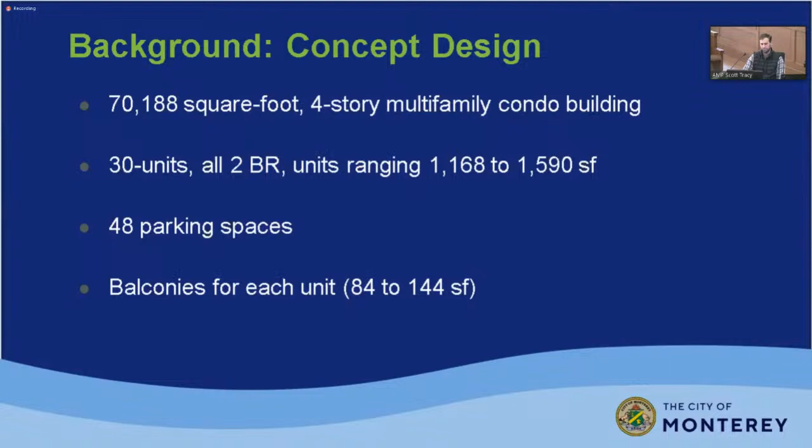So what we're looking at today is a new building. It's a 70,188 square foot, 4-story multifamily condo building. 30 units are proposed at this time, all 2-bedroom units ranging from about 1,100 or almost 1,200 square feet to almost 1,600 square feet. There are 48 parking spaces proposed between maintaining an existing surface lot as well as new garage parking spaces at the bottom level of the building, and there are also balconies proposed for each unit, ranging from 84 to 144 square feet.

Here's the site, I just wanted to note the adjacent uses. On both sides, east and west of the lot, we have commercial office uses, typically medical office or other professional office uses. The golf course is to the north, and then residential. This is county land to the south across the highway. I'll note we don't have any aerials that show the since demolished building, but if you can imagine, there's no building there anymore.

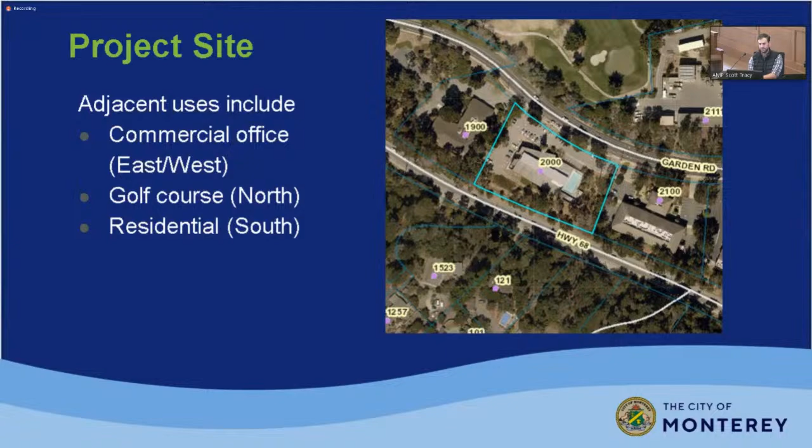Here we see the site plan. The proposed building would sit in almost the same footprint, expanded a little more than the previous structure. The existing parking lot here would be converted to some format of open space. We don't have full details on what that might look like, but that's one of the staff comments, and the ARC may be asked to provide further discussion on what they'd like to see in an open space area like this.

There are two driveways at the site, shown by the arrows. These are existing. You can enter from the west side, where there's an existing parking lot that continues in this direction. On the southwest side, many of those spaces would remain, and new spaces would be constructed in the lower level of the building. The circulation would work such that you enter from the west side, drive through the lowest garage level, and exit through a driveway ramp that connects with the existing drive on this side.

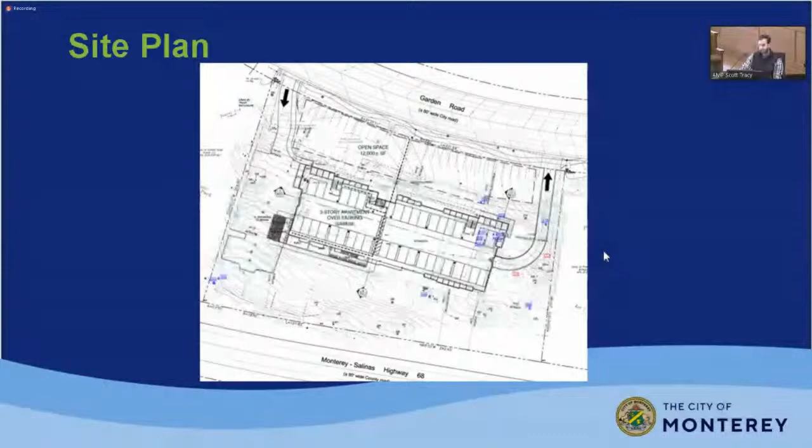Also worth noting is a number of tree removals associated with the project, highlighted with the blue and red notes here. Some are in the footprint of the building, others outside of the footprint but either very close to the building or in poor condition based on the arborist report. I forgot I had a zoomed in view, so you can see these things slightly better here. Again, you drive on the west side to exit through the east, with open space on the north side.

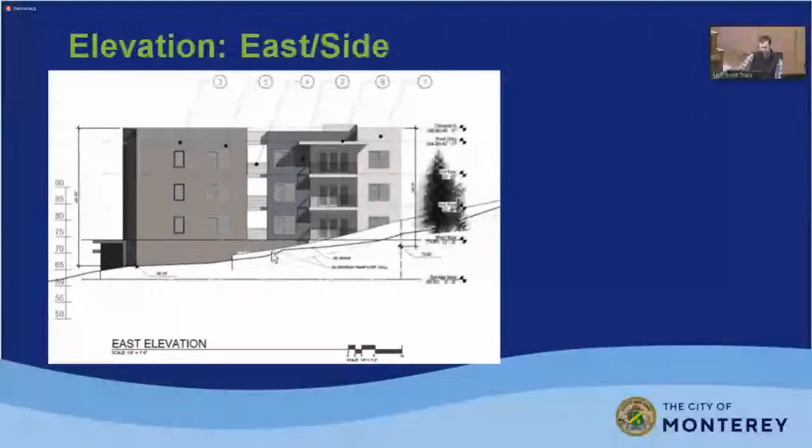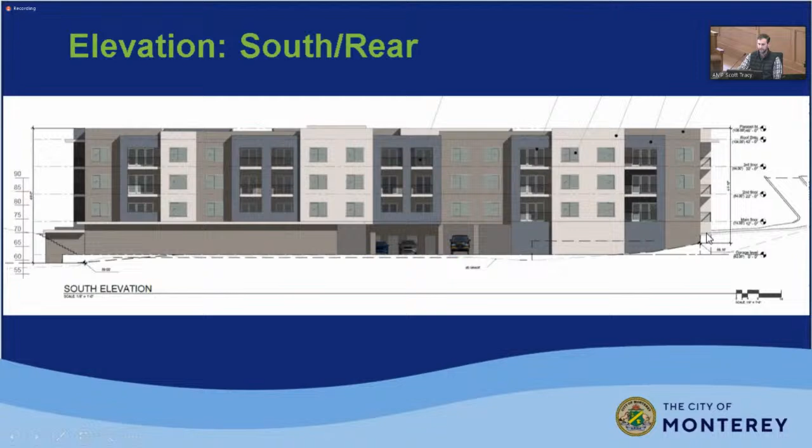And the rear elevation. I'll note that driveway—I'm not sure what you'd call this type of rendering or design, but it shows geometrically what it would look like as you exit out of the garage there.

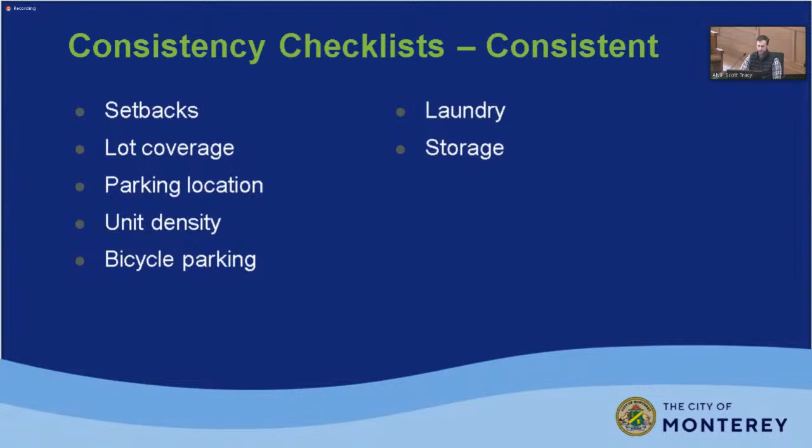In terms of consistency with the city's zoning requirements, the project is generally consistent with items such as setbacks, lot coverage, parking locations outside of the front yard setback, unit density, and bicycle parking. It includes laundry—the requirement is one washer and one dryer per five units, and here each is provided for each unit. Storage is also required, and there are some inconsistencies the applicant and staff can work through via various processes in the city code.

The height requirement in the IR zone is 35 feet; the proposed height is 49 feet. The open space requirement is 600 square feet per unit, which can be a mix of private open space from the balconies and shared open space. 484 square feet, or close to 500 square feet, are proposed per unit.

The parking requirement is 60 spaces, 2 per unit. 48 are proposed. The landscaping requirement is 20% of the lot size as the minimum requirement.

We don't have that specific detail yet, but it's something that can be done based on the proposed site plan. Lighting is required to be directed downward. We don't have those full details yet either.

And then tree preservation. Essentially, the multifamily overlay zone requires that healthy trees, or healthy groups of trees, be preserved if possible. In the case of this project, 14 are proposed for removal. They include a mix of Monterey pines and coast live oaks. Based on an albeit older arborist report, the health ranges from dead, poor, and fair, so none of the proposed trees for removal are in good condition.

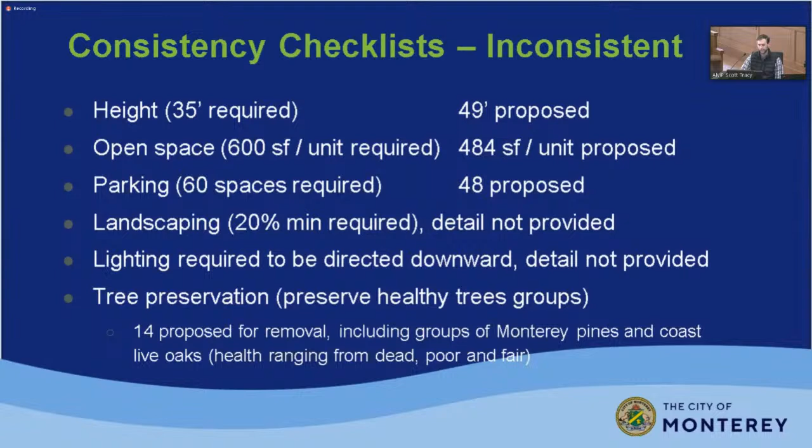Other considerations - and again these are preliminary plans, we will have more complete plans - grading and cut and fill are not shown. The slopes and retaining walls that would be needed for the project would need to be shown. The final pervious versus impervious surfaces are not shown, and no stormwater control plan has been provided yet. Open space areas will need to be clearly measured and defined once we have a better landscape and site plan.

The parking would be required, and staff can work through some of those parking requirements with the applicant. More information is needed on the current status of trees, and whether some of those trees need to be removed for health related reasons versus development related reasons.

And the city code does require crime prevention through environmental design, so we could work through those design elements with the applicant. The final architectural style and finishes can be further defined. And lastly, there's no specific landscaping plan for this project, so additional detail on that, based on potentially comments from the ARC, would be necessary, and then some final details on the trash collection would be required.

I like that location better. I also like the interior door. When I was single, I lived in places like this, and it was not fun to go out at night sometimes to dump my trash. So the interior door is a nice feature.

So Chris, the 484 square feet of open space per unit, does that include each balcony? Right, and I think it's actually even a little more than that, because I don't think the 144 square feet were included in that calculation. So it's close to 500.

500, okay. And there is a process built into the code where an applicant can request an exception from the community development director, an exception as low as 350 square feet. Obviously the staff will want as much open space for the residents as we can possibly place on this site.

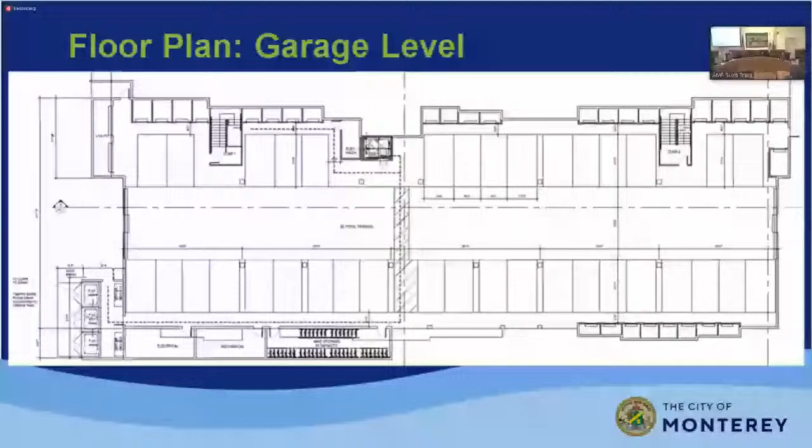I'll just note a comparison of the project open space for the prior project, the conversion project. The prior project maintained these parking spaces in order to meet that parking requirement, and so the open space was really located on the south and east sides, which have a lot more topography. Generally the staff was supportive of converting the parking to open space, for obvious aesthetic reasons, but also because it's a more usable open space area based on the difference in topographies.

And I guess you're going to want to replace even double the amount of trees to fill that space. I'm not too worried about those tree removals, hopefully. It sounds like they're less favorable trees at this point anyway, so hopefully that's going to take care of itself with the landscaping going up in the front there.

Are there opportunities to plant trees on the 68 side to obscure the building? Are there requirements for Highway 68, since it's a scenic highway, to obscure a building, and are there opportunities to put trees there? Yeah, so there are a number of trees there, but there certainly could be more.

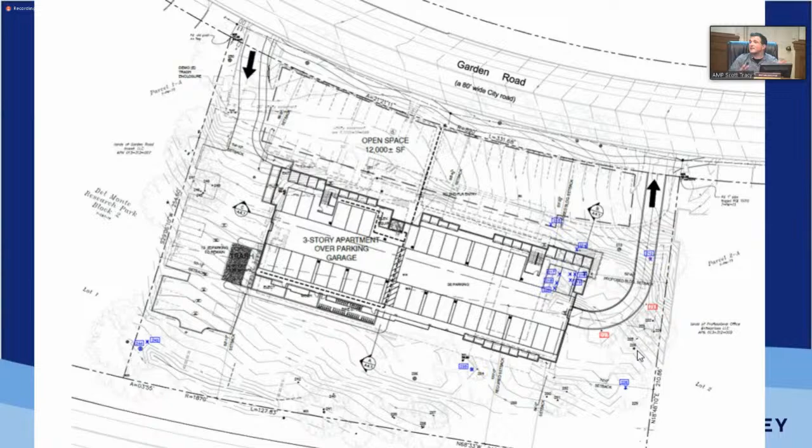Like just have some evidence to help us understand how visible it will be or won't be. As far as just like an elevation, I know the site goes down from Garden Road street level. Do you happen to know what the elevation would be from Garden Road? So Garden Road across the parcel actually rises about 9 to 10 feet from one end of the parcel to the other. So depending upon where you're at, I believe you'll see approximately 20 feet on one end and 11 on the other.

Yeah, so on the west side, based on their survey data, at the west corner of the property we're looking at close to like an 80 or 75 contour in terms of feet. So if you relate that to what they show here - if you can see where my mouse is - anywhere between these two areas is where you would kind of see the finished level of the existing roadway above. So it'll feel generally like a 2-story building from the low side. The high side will feel like a 1-story building.

It's really, as people have mentioned, a remote location. People are mainly driving through, barely walk by, barely bike by. I don't see that being a big concern from Garden Road.

For me, it'd be more so Highway 68. That's what I'd want to know. It's a scenic area, and our landscaping plan will have a ton of tree and foliage on that side of the road.

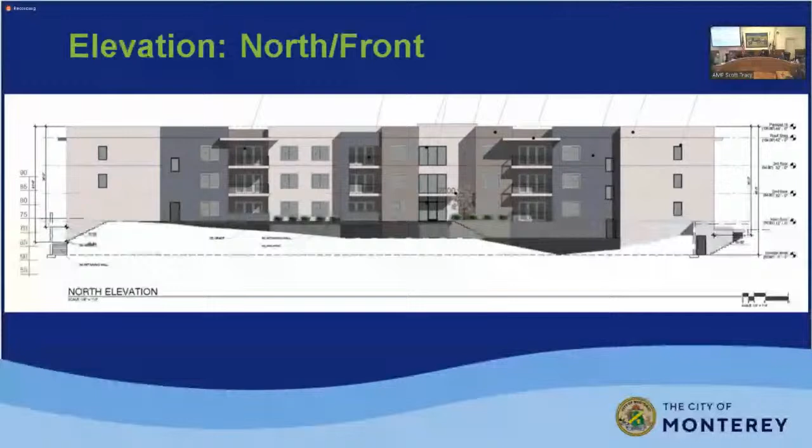Great, Chris, can you flip back another? This one gives us the north side and the south side. Something like this, where you see where the road is, where those cars are, how high those trees are, how much of this is going to pop out above those trees, that's what's going to help convince us and other citizens, because we don't like to have to field all those questions. We do our best with the trees and other things, but how much you can have that argument built for us helps.

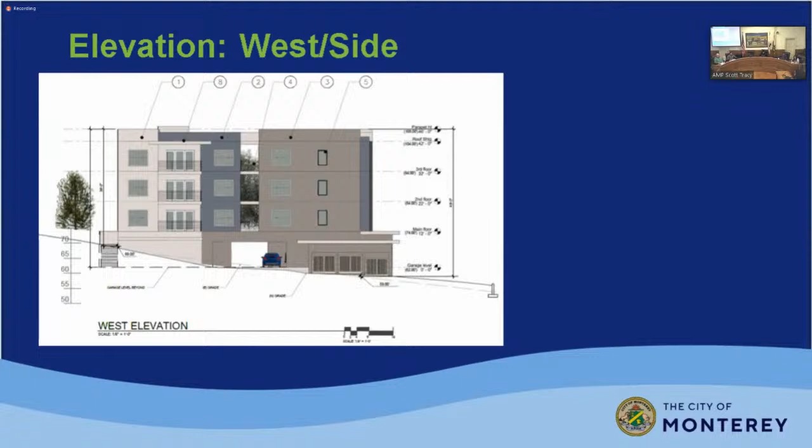Okay, any other comments on item 3? Let's move to item 4. Consider 2560, and Mr. Schmidt, I think you're in the driver's seat again. I hope. Nope.

Okay, I need to share my screen. Where do I go to share? I am sharing? Oh, I see your cursor. Okay. Oh wait, now I am, right? Okay.

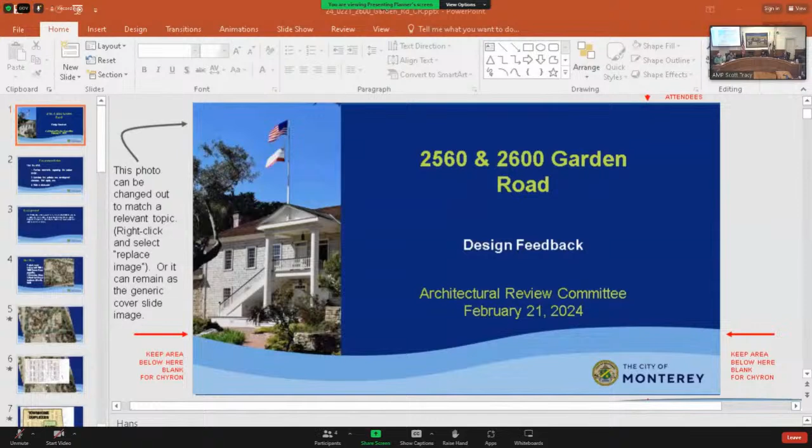You're a little rusty, huh? Um, that one? Okay.

Hello, my name is Fernanda Roveri, Principal Planner for the City of Monterey, and I'm covering for Matthew Buggert, Associate Planner. He reviewed this project, but he is currently unavailable, so I'm presenting for him. I was also the project planner for the original design for this project, so I am familiar with the site.

Although the site has changed somewhat, the previous plan was only to build at 2600 Garden Road, and now this current design is merging both lots, 2560 and 2600, for a larger development. This review is also to gather your design feedback today.

So we're seeking the same from the ARC. We are seeking design feedback, and that you consider the policies and development standards that apply.

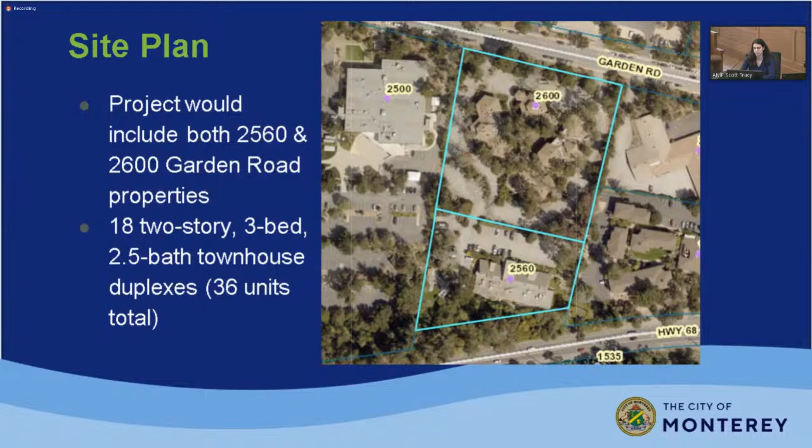And this is Matthew's doing. Nice, nice special effects. I can't do this.

Okay, so this is the site plan. There would be a single driveway in the middle of the site coming from Garden Road, all the way south toward the back of the property.

And then you would have basically 5 rows of townhomes. On the southwest side, there is a park with some play equipment, and it hasn't been defined yet, but that would make up the largest portion of the open space requirement.

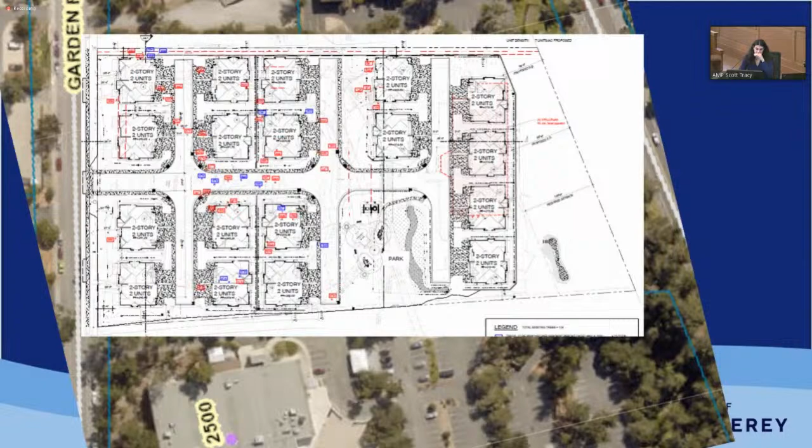Yes, that's just what I said.

And then there are 2 schemes proposed, Scheme A and Scheme B, and they look slightly different, but very similar. Scheme A is on the left, and they would all be roughly the same building height and square footage, but there's just some different modulation on the facade, as you can see.

But again, they would both have all townhomes with 2-car garages and 2 stories, and the same number of bedrooms and bathrooms.

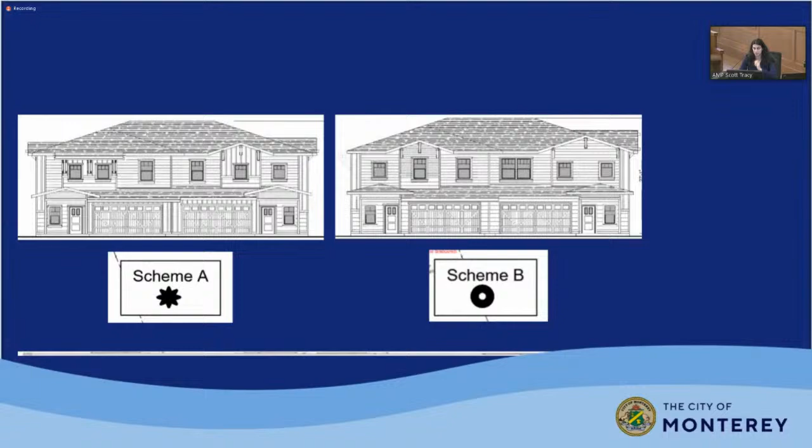So these are the elevations for Scheme A. Some siding and board and batten. I didn't look through the details, but that would also be further defined if this becomes an architectural review permit application.

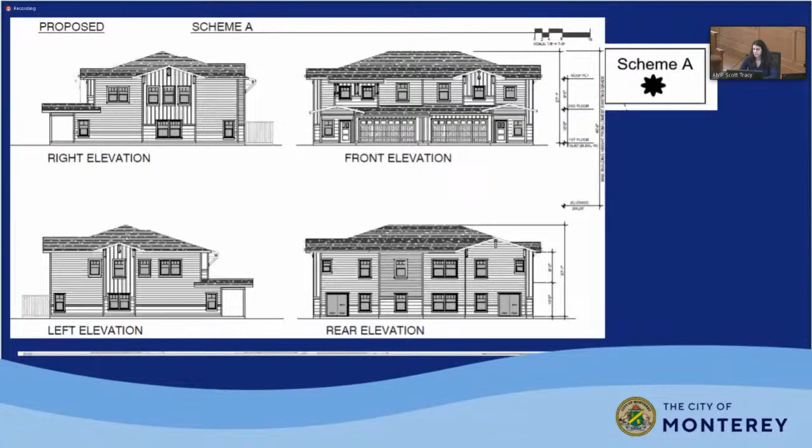That's just zooming in.

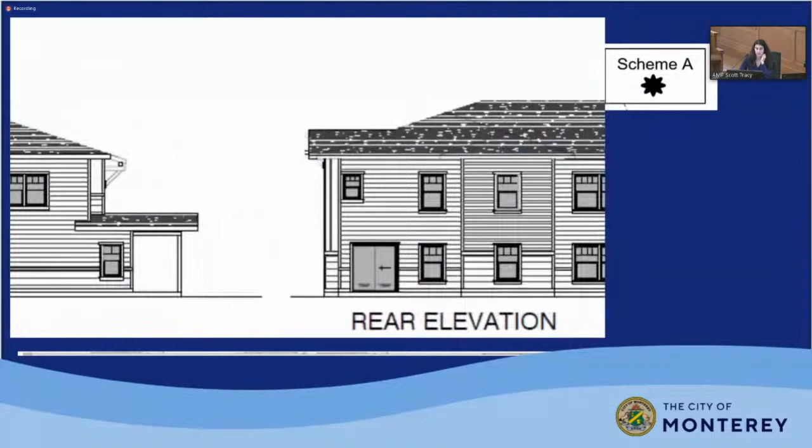Would have 3 bedrooms and 2 bathrooms. And I believe the half bath, yes, the half bath is on the ground floor. And then each unit would have laundry inside of it and separate storage, so that would meet the laundry and storage requirements.

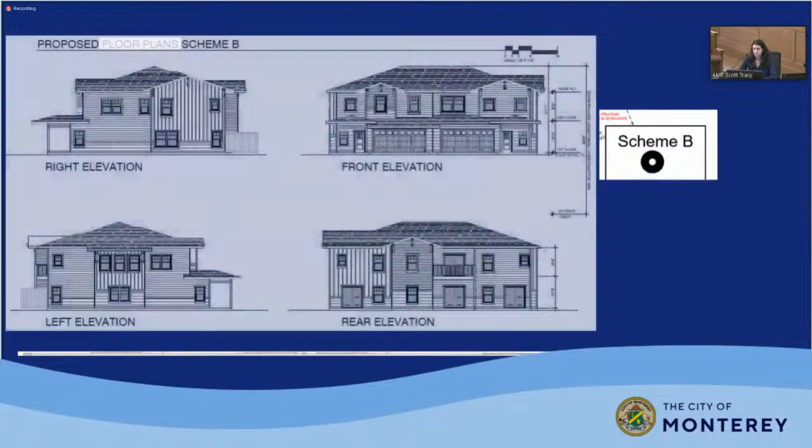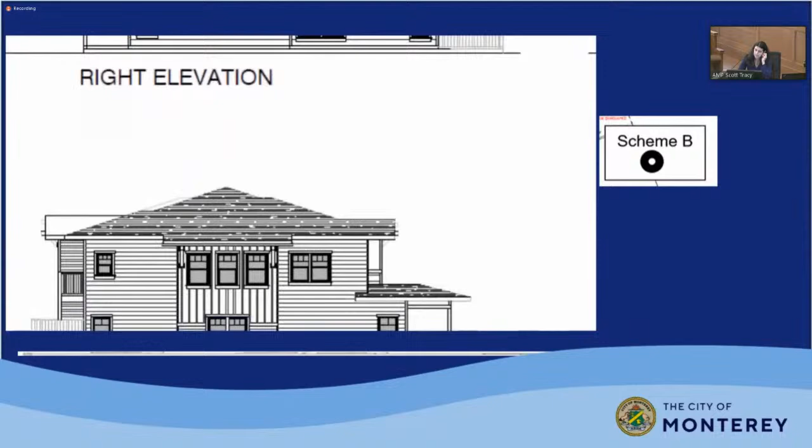And Scheme B is very similar, just again the modulation is slightly different, but the materials are almost identical. Almost the same floor plan, 2-car garages. Some might be a little bigger than others, like the office/bedroom here is bigger on the right. But again, same concept.

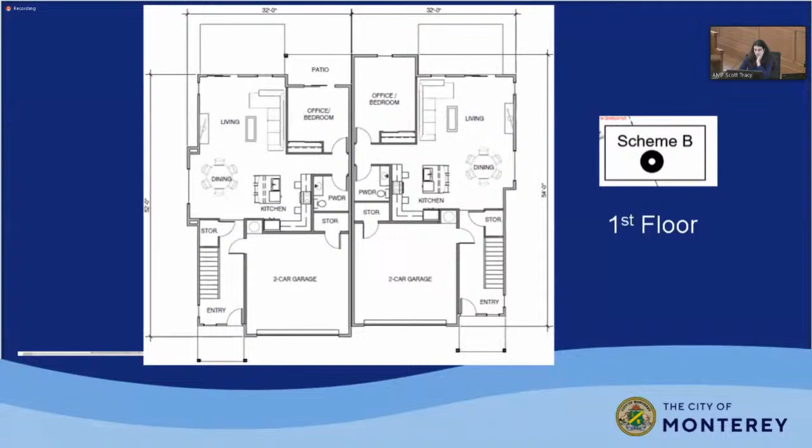Also having laundry and storage in each unit, and there are decks included. Yeah, it looks like one unit, the one on the left, has a deck and the other one does not, but the applicant can speak more to that.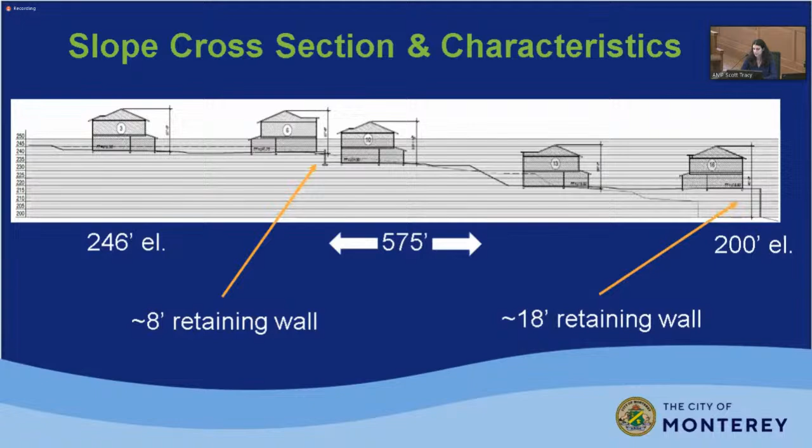And so the way that we measure building height is we measured to the lowest grade, whether that's existing or proposed. So according to this cross section, the lowest grade is the existing. And then we measure to the top of the highest roof ridge. And so that would be a measurement of 45 feet, 9 inches.

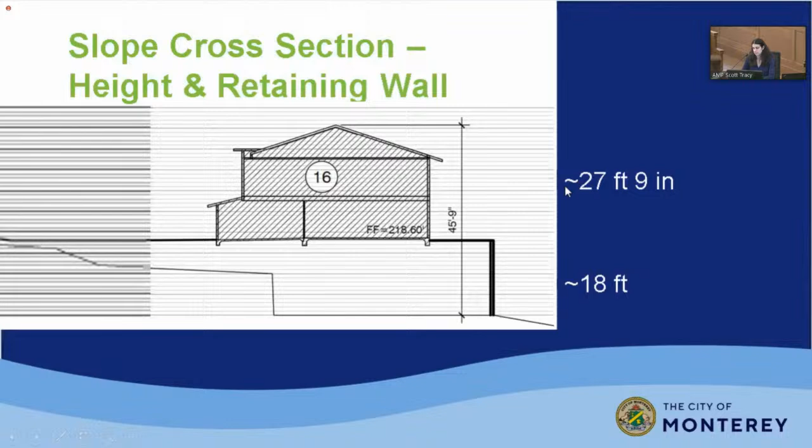So that would exceed the 35-foot height limit. However, the building itself would only be 27 feet, 9 inches tall. And in the report, there is a consistency checklist. So it's consistent with most of our zoning standards.

However, the setbacks, it's inconsistent with some of the setbacks. The front setback is 50 required, but the proposal is 26 feet, 4 inches. And I can go back to that if you need. The side setback is 50 required, but it's much less than that is proposed. It's about 12 to 11 feet.

The rear setback. Matthew was reading that general plan policy and applying it here. So that policy says 100 feet required, but this, I guess it wouldn't apply to this site. I'm just not very familiar, but we can double check on that.

The height is 35 feet maximum, but 45 feet, 9 inches is proposed. And there are at least 56 trees proposed for removal. And so there is a section of our code that says groups of trees or groups of Monterey pine and cypress and coast live oaks should be retained.

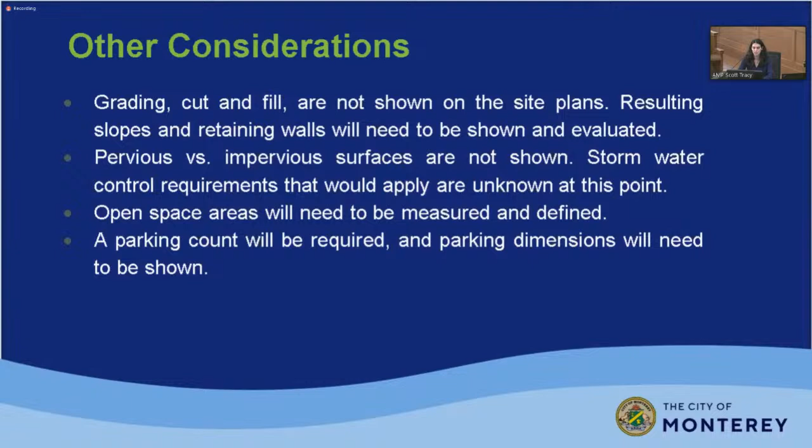Open space areas will need to be measured and defined, and that includes private open space like decks and balconies versus public open space like the park. A parking count will be required, and parking dimensions will need to be shown in order to make sure that a proposal complies with our parking dimension standards.

And like I said, an updated tree report is required to understand the health of the remaining trees, and replacement tree ratios.

Crime prevention through environmental design will need to be incorporated, so that again includes lighting and having eyes on the street, etc. And architectural style and finishes will need to be further defined. Like committee member Schmidt mentioned, details for a barbecue area or usable space will be required, and proposed trash enclosure and collection information will also be required.

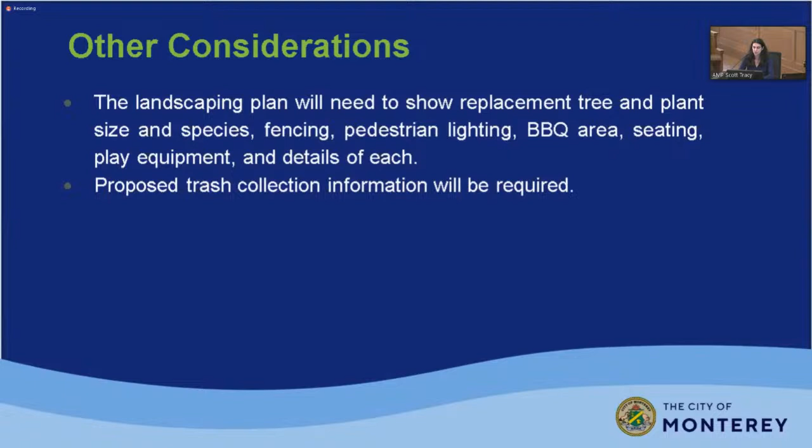And so with that, we are seeking design feedback, and the applicants and owners' representatives are here.

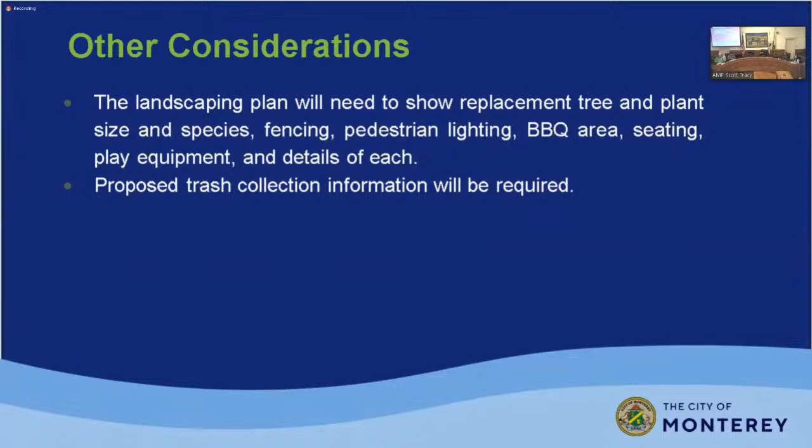Thank you, Fernanda. Can you go back to the kind of aerial view? I don't know how easy it is to go backwards. Toward the beginning. Yeah, so we can kind of have that view without the different. Yeah, keep going. That'll do. Okay, just leave that up for me if you don't mind.

So I don't see any additional parking at all, just the garages. Right, but where do guests park? I'm just curious, we only identified the 2-car garage for each unit, and then 2 driveway spaces in front of each garage, but we need more information. That's why we need the parking spaces identified and dimensioned, so that we understand where all the parking is going to go.

And then the side setbacks are like 12 feet. That's what Matthew measured, and it looks really tight. If you see the property line here and the wall, I can't make out that measurement, but it's much less than 50 feet.

And right now, is there anything on either side of this property? Buildings? Yes, I believe it's a church. Church on the bottom side, hotel top right, and a gym, commercial building top left.

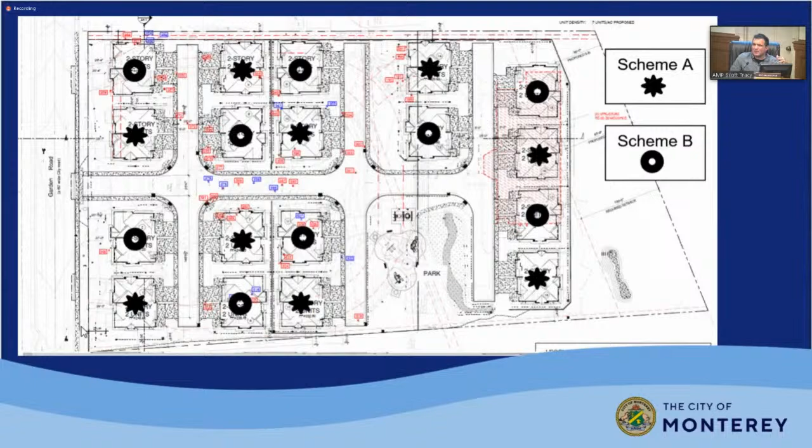All right, I'll open it up for questions for Fernanda. Well, one of the first slides mentioned something about these being consistent, and some of that was density and stuff too. Can you just help us understand that a little better? Seems maybe not dense given the context or something, but curious to understand that.

Oh, sorry, other way. Okay, so the lot sizes, the lots will be merged. I don't know where that stands, but that would be required for this development to happen. The lot coverage, there is a lot coverage percentage. Let me see what page that's on.

Is that density just based on the lot sizes or the area plan, both? The density is 30 dwelling units per acre. That's the maximum. But after the lot merger, how big will the parcel be? 228... 226,000 square feet. It's just over 5 acres.

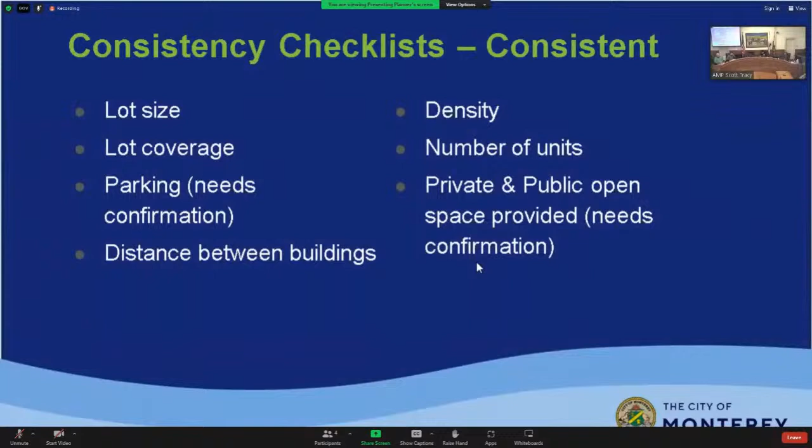I think that's a lot of good questions there. And now's probably also an appropriate time to mention, since we're talking about setbacks, that we did confirm the Caltrans map is a little bit contradictory as far as state designated scenic highways and eligible ones. But we were able to pull the actual designation documentation from 1968 that does say state Route 68 in that location is designated. So that policy from the general plan, the 100-foot setback, would apply.

However, it should also be noted that's also a standard that could potentially be waived through the density bonus affordability that's provided. And you just figured that out just now? Just now. Wow, you guys are good.

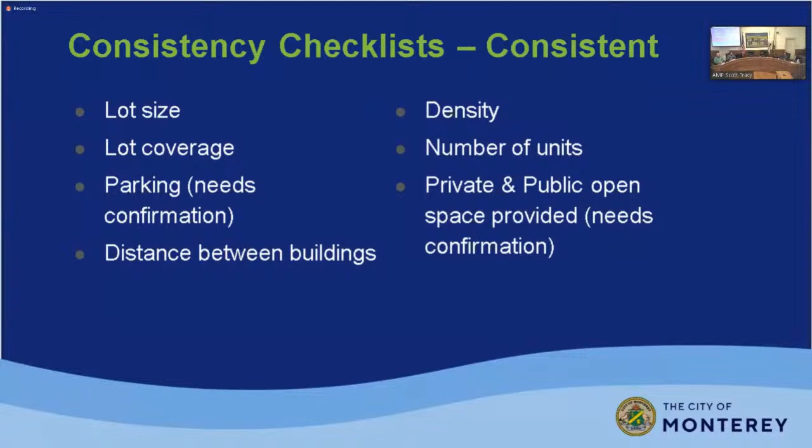Is that going to be a problem? That seems like a huge jump, 40 feet from 50 feet down to 12 and to 11. Especially if the next door neighbors say, well, they got to build their building 12 feet from the fence, how come we can't? So I don't know how that works. Is that setting a precedent that we shouldn't set?

So the setback going down to 12 feet, that again would be one of the incentives, or waivers of development standards that we would apply, because variances are difficult to come by. So through waivers, by providing the minimum 20% affordable units, we would probably encourage them to apply for the side setback waiver.

And then the height, that could also be another one. The front setback, there are two requirements: there's a 50-foot front setback requirement, but there's also another requirement that says no parking shall be located in the front setback. So they would have to request 2 waivers for the front to put their buildings at 26 feet from the front instead of 50. That is a little more difficult. We would have to work that out with the applicant.